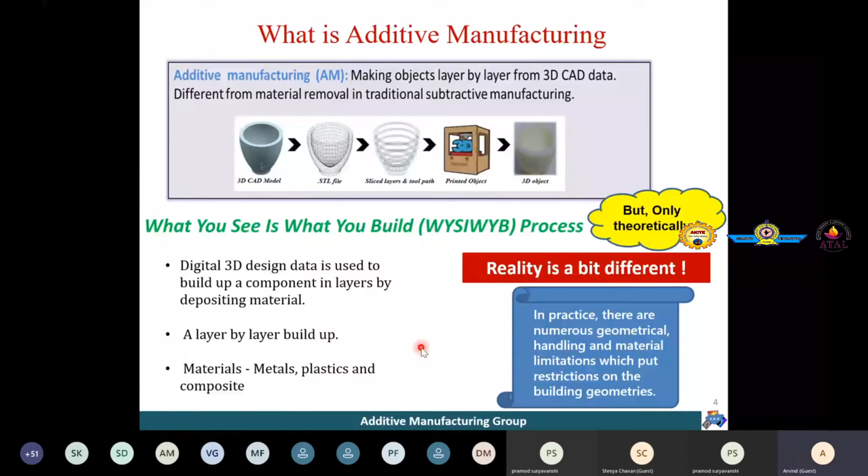So as I mentioned, in 3D printing, digital 3D design data is used to build up a component layer by layer by depositing material. And we follow a bottom-up approach, meaning a layer by layer build up. Different kinds of materials, metals, plastic, and composites are being used.

This slide shows the basic difference between additive and subtractive manufacturing, which is quite obvious, and I'm sure you know that. In subtractive manufacturing, we start with a bulk feedstock and apply different subtractive manufacturing technology to remove material in order to get your final 3D part. And in this process, a lot of wastage of material occurs.

On the other hand, in additive manufacturing, we start with powder material, and following a bottom-up approach, we deposit the material in a layer by layer manner using a 3D printing machine, and then we get our 3D part. As a result, the wastage involved here is very little. So this is the main difference.

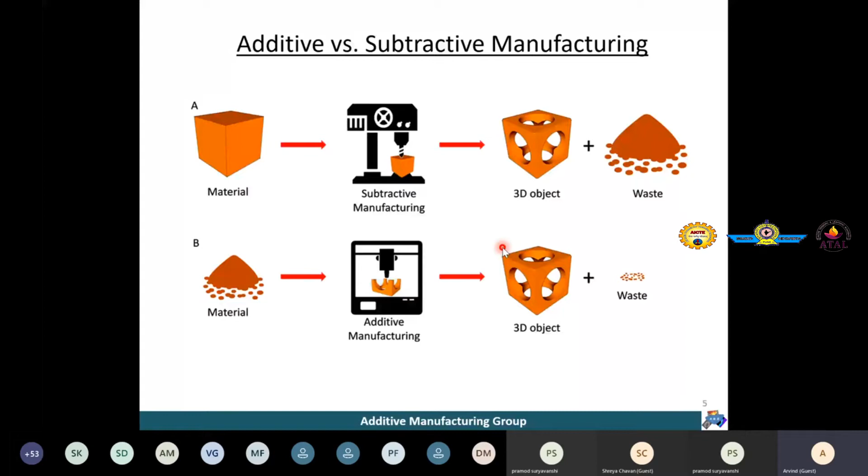In subtractive manufacturing, you might need several machines depending on the final part. However, in additive manufacturing, one single 3D printing machine can do this job for you. And this way we can project additive manufacturing as one of the green manufacturing technologies, because it involves less wastage and less energy by using a single piece of machine.

This additive manufacturing or 3D printing technology is growing very rapidly. Since the last 10-12 years, it has grown to a very large extent, and in the past, none of the manufacturing processes has witnessed such a high growth rate. So there must be some benefits attached, and that is why it is growing so rapidly. I'm just listing some of the main benefits of additive manufacturing.

The first is it involves much reduced material waste and energy consumption. Then second is tooling reduction by single machine requirement. Third is it involves very short time to market, which will help you to reduce inventory. Then using additive manufacturing, you can exercise prototyping and testing right at the concept level.

If you see that the prototype is not passing the test, you just go back to the computer, change the CAD model, and then immediately build the next design.

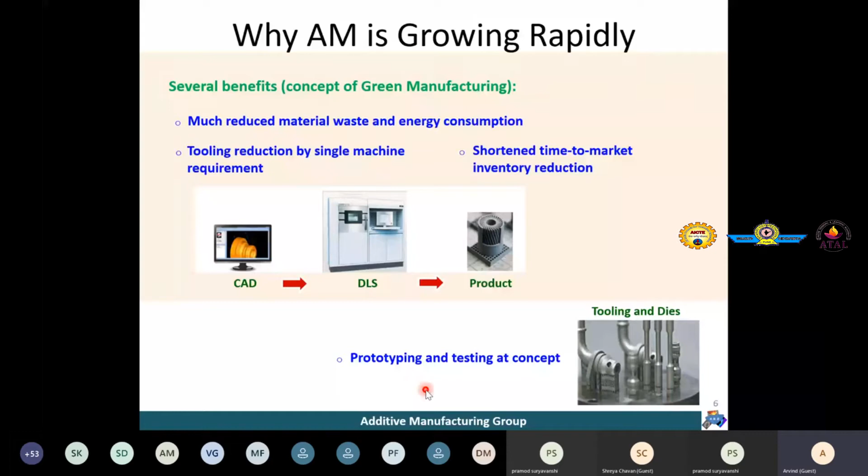Next advantage is complex shapes are not an issue in additive manufacturing, and you can see the figure below, a very complex heat exchanger and then hydraulic component with complex internal channels and complex geometry, and even conformal cooling channels can be very easily manufactured by additive manufacturing. However, this can be really impossible by conventional subtractive manufacturing.

Light weighing is another big advantage of additive manufacturing, where you can design the material suitably at a suitable place, and you can achieve light weighing.

For example, the light weighing example is given here. A traditional bracket used in aircraft, made by forging or forming process, weighs 2 kg. A new design created by additive manufacturing weighs only 300 grams, and it does not compromise performance. So you can see, for just one single part, you can reduce the weight from 2 kg to 300 grams. In an aircraft, several such parts could potentially be manufactured using additive manufacturing, and you can see how much weight reduction is possible. This is one example in a big aircraft, or in automotive, or even a single part use - you can reduce weight, right? You just have to check that you do not compromise performance.

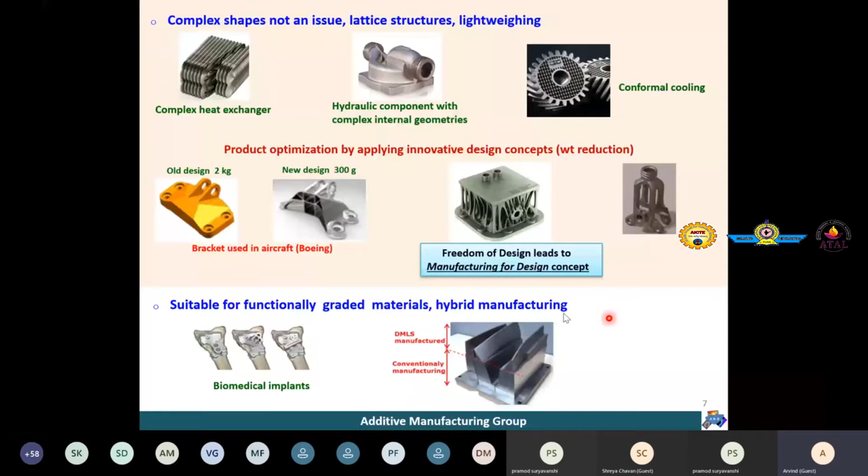So at present, our context is that we can see a significant increase in the market for additive manufactured parts. You can see the business for 3D printing parts from year 2012 to projected 2025 is increasing at a very high rate, and throughout the world, different countries are diverting their focus onto additive manufacturing with a large chunk of funding to develop world-class facilities.

In India also it has started, but with very low attention. In India, we need to develop additive manufacturing technologies for indigenous production of AM components, and process development for various metals, so that our OEMs and other related industries can be impacted. This is one reason that we in India, as researchers, as students, need to address this issue very well.

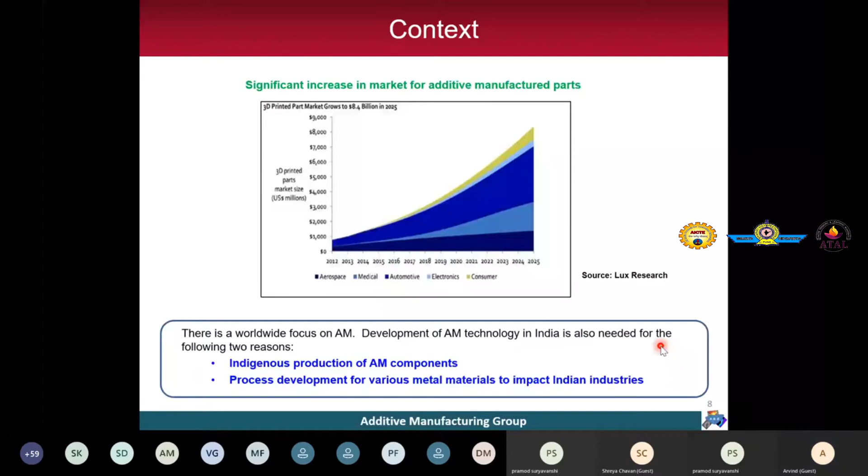So now, since the topic is on metal additive manufacturing, metal 3D printing, I come down directly to metal 3D printing. In metal 3D printing, basically we have two technologies available: one is based on powder bed fusion, and the other is based on powder delivery.

In powder bed fusion, you have heard about processes like selective laser melting, called SLM, and now it is referred to as powder bed fusion technology. If laser is used, it's LPBF. If electron beam is used, it's electron beam powder bed fusion. In powder delivery based technologies, we have laser metal deposition, also known now as directed energy deposition, where...

In the powder bed fusion process, we first lay down a layer of powder on the build plate and selectively apply laser to melt and consolidate it to create the final part of that layer.

In powder delivery based process, we actually feed the powder particles coaxially or through multiple nozzles simultaneously along with the laser. We do not lay down any powder layer there. The fed powder particles meet at the merging point of the laser at the substrate, where they melt and form a melt pool, which then resolidifies to create a deposited solidified layer. This is followed in a layer-wise manner.

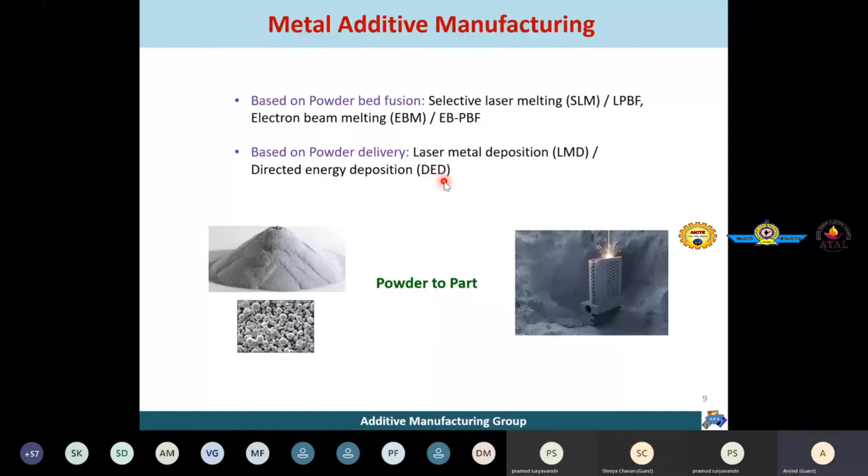So if you look at powder bed fusion technology, we have a powder layer, and we selectively melt the layer using some thermal energy source. This source could be laser or electron beam. Such machines are commercially available from different manufacturers like SLM Solutions, EOS, Concept Laser, Realizer, Renishaw, 3D Systems, etc. The powder bed fusion processes are relatively slow, but they ensure good dimensional accuracy, flexible design, and complex parts.

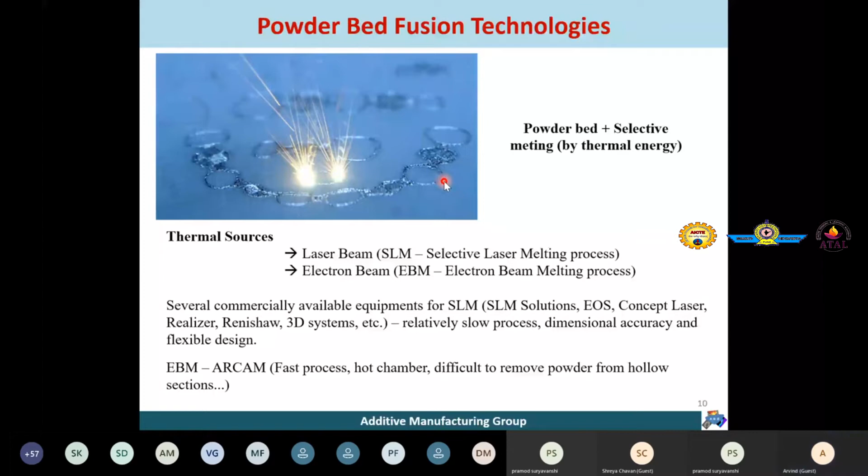So if we see the selective laser melting process, you can see the schematic of this process. We have a previously fused layer or build plate, then a current powder layer, and the laser beam is traversing from left to right. So from the left side we have solidified layer, below the laser beam we have the melt pool, and on the right side we have loose powder.

We can see clearly that as the laser beam traverses, it creates a local melt pool, and as the laser traverses further, the local melt pool re-solidifies to create a consolidated layer. So we can see different kinds of physics, like solidification here, the interface of melt pool and powder, and the melt pool where convection patterns and flow of the molten metal can happen.

Laser is interacting with molten liquid, and here laser is also interacting with some powder. So it is a complicated scenario involving several physical phenomena.

And this is for one current layer in one track. If you want to make a 3D part, one layer needs several tracks, and then several such layers would be required to complete the full height of the part. Build up is always from bottom to top, so build up direction will be vertically upward. Till now, no SLM process has been developed where you can do inclined build up and all.

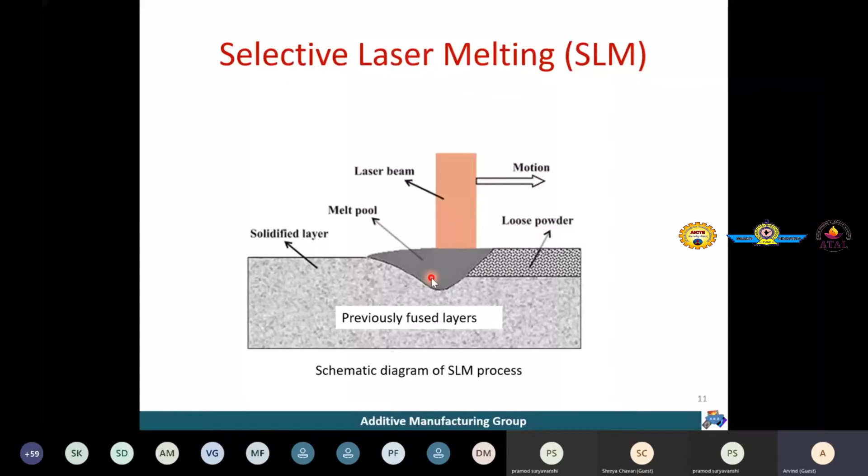So I want to show you one animation where you can see how this SLM process works and creates complex parts.

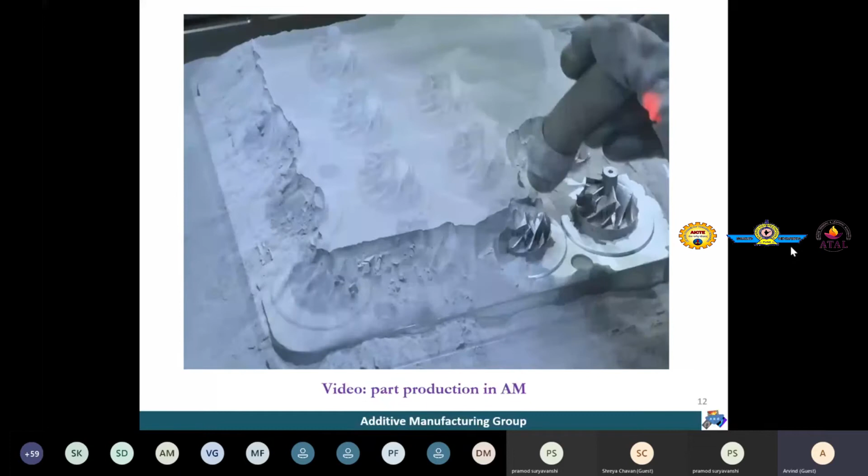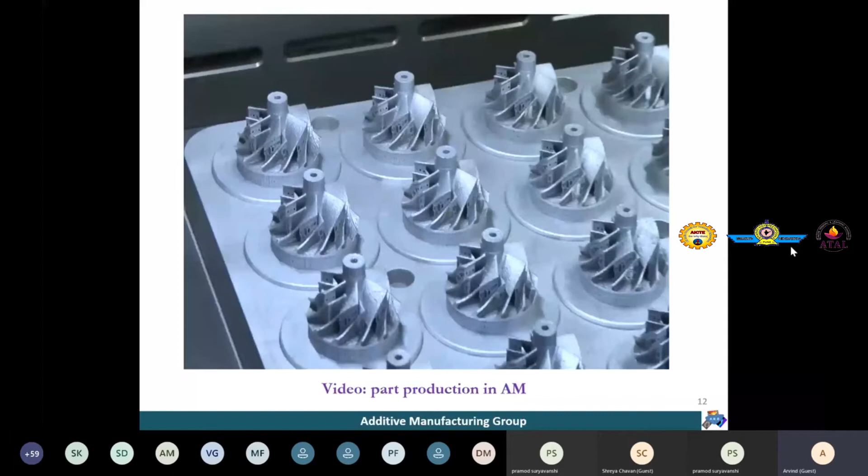Okay, so you saw the video. It looks very straightforward and simple, that you feed some input to the machine and the machine will give you the final printed part. But as I mentioned, for a new part, a lot of understanding of the pre-process, like design aspects, is required, and that has to be sorted out.

Then that design is converted to an STL file, then slicing and tool path generation, which is very important. Then process understanding, how the melt pool forms and how that is related to microstructure and then mechanical properties, that understanding is required. If you play around with all these aspects very carefully, then only can you expect to get a part which will fulfill your performance requirement.

Otherwise you can still get a part, but it will not fulfill your performance requirement. It's like a bad or defective part. So the challenge lies in understanding a lot of pre-processing and process understanding to create defect-free parts, and even after that you need post-processing techniques for improving surface finish, or heat treatment, or techniques for porosity reduction like hot isostatic pressing.

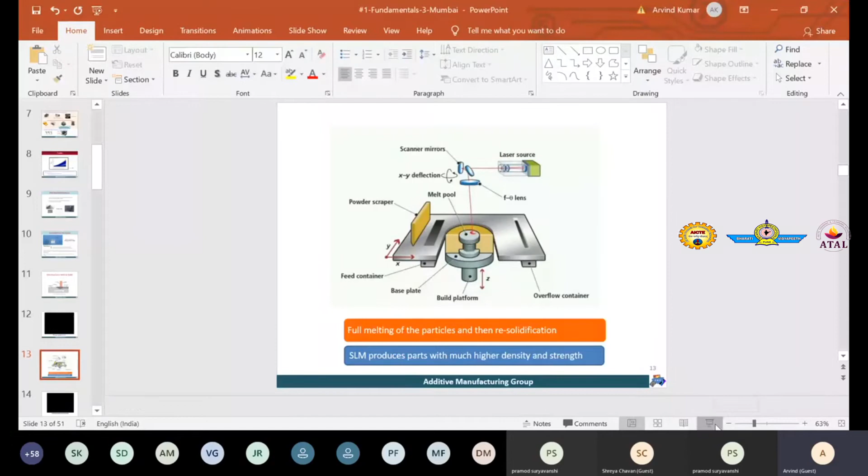Sir, your PPT is not visible, sir. Okay. I think now can you see? Yeah, it's visible. Okay, when I saw the video, I think I have to share again. Okay, yeah, okay, okay, you can continue.

I was telling you that since SLM involves full melting and resolidification, we get part density close to the true density of the material, and that's why we can get higher strength, and the parts produced are something like cast product and welded product.

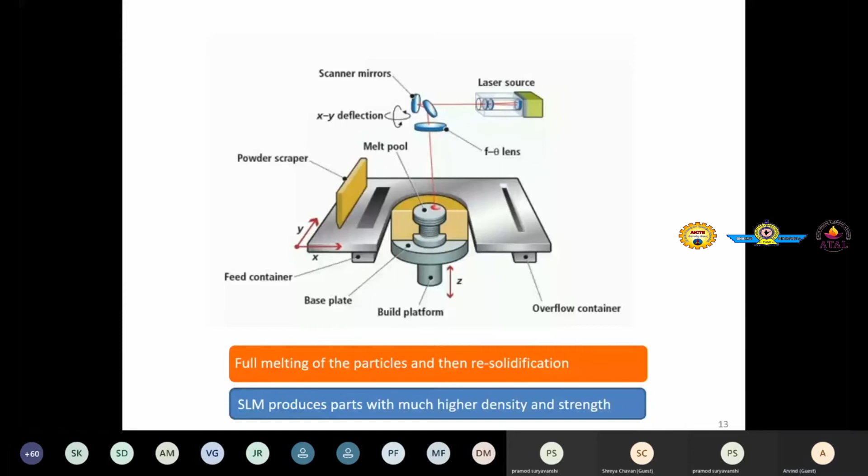So I'd like to show you another video for how laser interacts with powder.

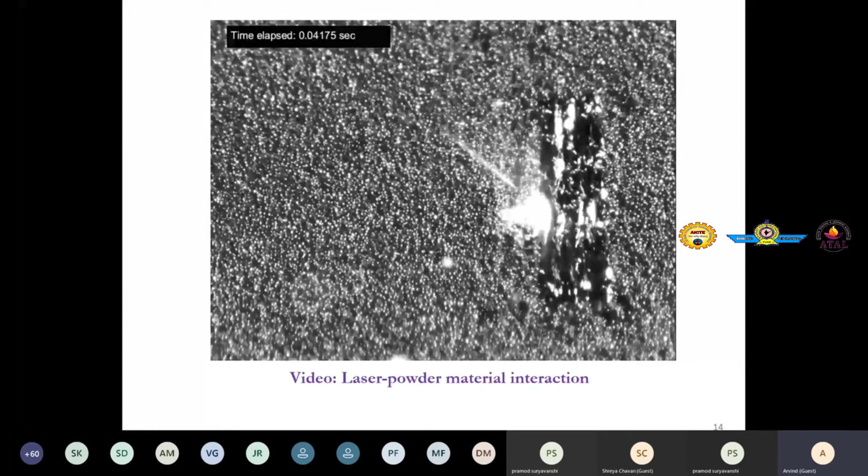You see in the layer several micron-size powder particles are there, and when the laser is impacting and traversing along the designated tool path, local melting and solidification happens, and the melt pool consolidates to a solidified layer. And it happens so quickly, you can see the real time involved there in the video.

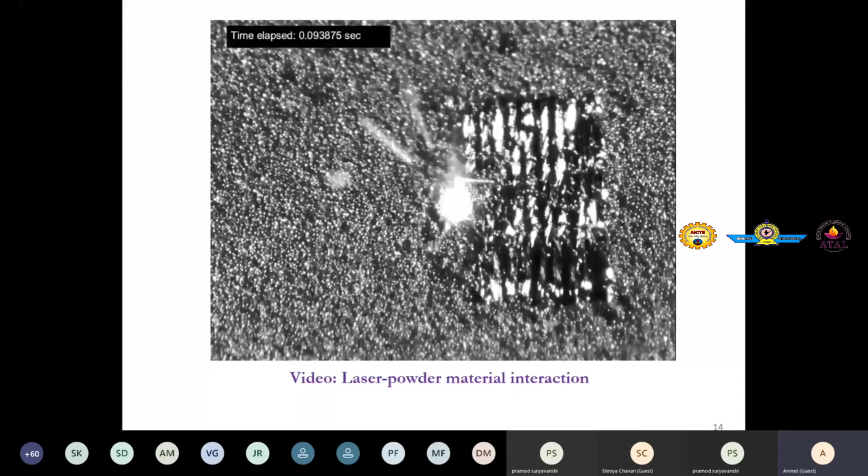Coming to the next slide, we can list down the advantages related to SLM process. This process can be applied to various materials if they are available as powders, and complete melting of powder produces parts with much higher density and strength.

We saw the process is happening quite rapidly. Rapid melting and solidification of these metal alloys results in unique properties that are distinct from, and sometimes more desirable or better than, the cast or wrought parts made from identical alloys. Rapid melting and solidification in such a small melt pool leads to a very fine microstructure, and fine microstructure leads to very good strength.

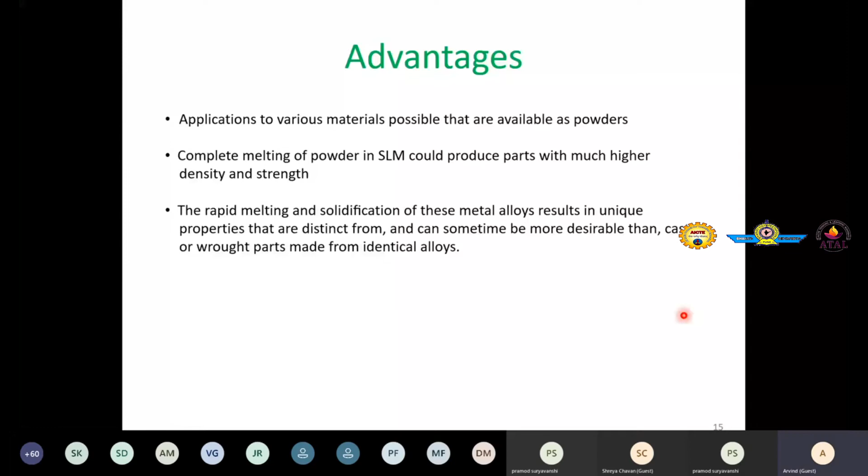At present, different materials are being used in the SLM process, starting from stainless steel, which is used for functional prototypes; tool steel, used for injection molding and functional prototypes; commercially pure titanium, for implants and medical devices; Ti64 alloy, again for implants and high performance functional components; titanium niobium alloy, for implantable devices; aluminum alloy, for functional prototypes, series parts and automotive applications; and cobalt chrome alloy, for functional prototypes and medical and dental applications.

These are for metals, but SLM can also be applied for composites, plastics and polymers, and sometimes metal matrix composites or polymer metal composites. Nowadays it is also being tried for metal nano composites. Some research is going on; in fact, for metal nano composites, we are also working on one problem using the directed energy deposition process.

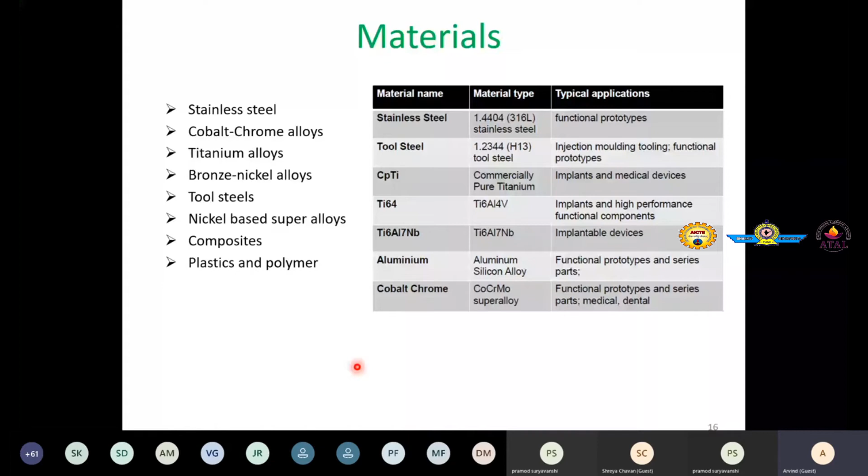Now, if you see the process, as I mentioned, process understanding is crucial here. We must understand what parameters or aspects are involved in the process. These parameters could be categorized under different categories like material parameters, laser parameters, and process parameters.

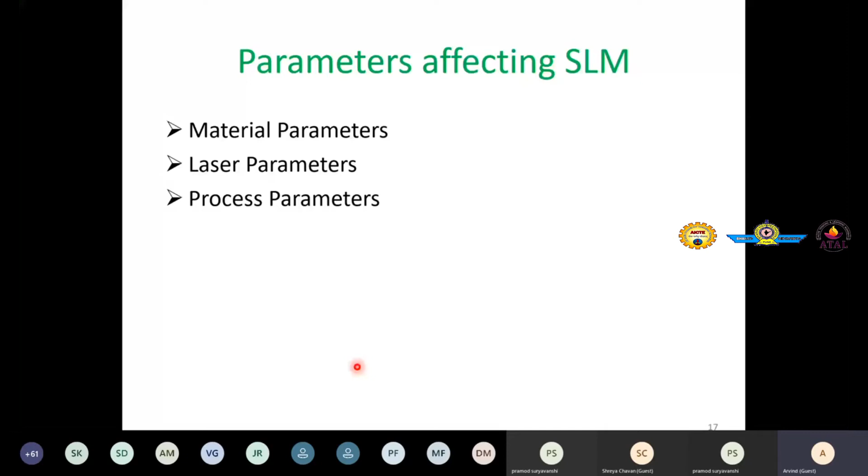Starting with material parameters: this means powder characteristics, involving its shape, size, thermal properties, optical properties like laser absorption characteristics, and the particle should not be too reflective and so on.

Powder size distribution is also important, because while spreading the powder layer with the recoater, the powder should be flowable. So powder size distribution becomes very important. Typically in SLM process, we want a very narrow powder size distribution, so that most of the particles are more or less uniform in size and spherical in shape. Powder morphology comes here too, the shape - spherical shapes are desired.

So shape, morphology, and size distribution affect the generation of the powder layer. Since it is the first input to the process, where the laser interacts and creates the solid part from that powder layer, it is very important that powder characteristics are well chosen.

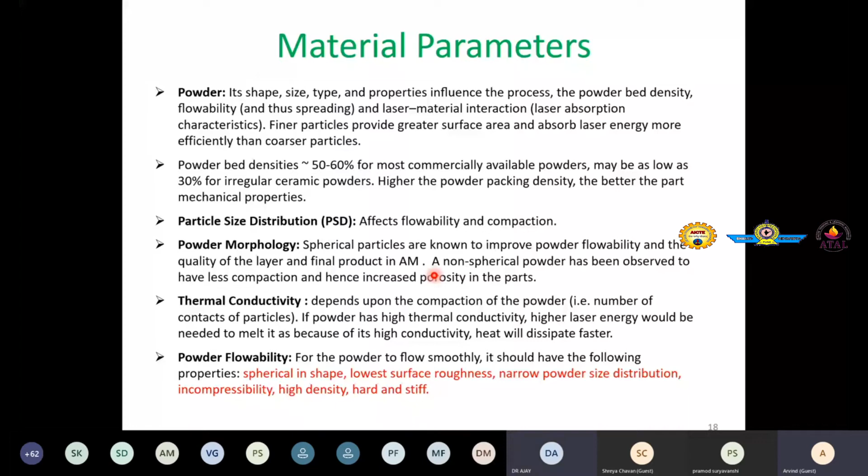Then comes the second category, laser parameters. Various laser parameters include pulse width, pulse rate, time gap between two pulses, wavelength of the laser, mode of operation of the laser, beam quality, spot size, laser power, and so on. Most laser beams do not have uniform energy distribution - they have Gaussian or other kinds of energy distribution, like top-hat. This distribution needs to be understood, only then can we develop a good understanding of the interaction of such laser beams with powder material.

All these affect the process. Laser power, spot size, scan speed, and powder bed temperature together determine the energy input needed to fuse the powder into a consolidated part. The longer the laser dwells in a particular location, the deeper the fusion depth and the larger the melt pool diameter. In the SLM process, typical layer thickness ranges from 100 to 150 microns.

In fact, this is large - there are processes where the layer thickness is about 20 to 30 microns. So you can imagine, if layer thickness is that small, your particle size should also match that layer thickness - it should be lower than the layer thickness. When you use finer particles and finer layer thickness, you can expect the surface finish will eventually improve.

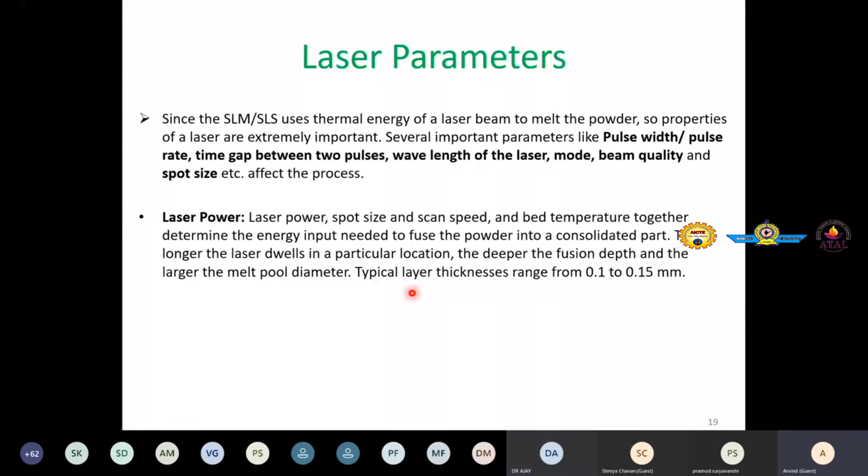After laser parameters comes process parameters. Here, you can guess what the main process parameters could be, like scan speed, hatch spacing, layer thickness, and scanning strategy.

Scan speed directly influences the productivity and affects the density of the final processed part. Hatch spacing is the distance between two successive scan tracks, and a certain amount of overlap is necessary between consecutive hatch lines to avoid porosity and provide better layer integrity.

Layer thickness: with an increase in layer thickness, higher production speed is achieved, while with a decrease, higher precision is achieved. A good scanning strategy makes the resultant product free from distortion, warpage, anisotropy, inaccuracy, porosity, and thermal stresses. We will see some of these aspects in the subsequent slide.

Since we are talking about layer-wise production, there is a repeated thermal cycling effect, so you can expect a lot of thermal stresses developing, and that should be kept at an acceptable limit to avoid distortion and warpage.

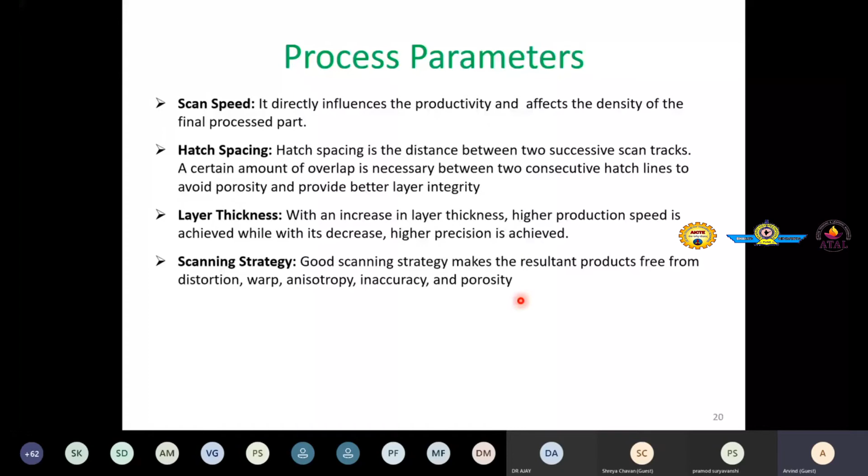Now coming to challenges in the SLM process, surface finish is one of the prominent challenges because you cannot achieve surface finish better than the particle size. Typically the particle size used is 15 to 40 micron, so your Ra value of surface roughness would lie in that range only. But there are many subtractive or micro machining processes where you can achieve very fine surface finish. So this is one challenge.

We have to compromise with surface finish, and if you want to achieve better surface finish after printing, we have to adopt some post finishing operation. But those post finishing operations can finish the exterior surface, while the interior surface finish is again a challenge.

Then the next challenge is the density problem. We typically want the part density to be close to true material density, something like 99.9% to 99.99%. But because of many reasons, like bad selection of process parameters, defects like porosity arise, and the density falls behind that close to 99.9%.

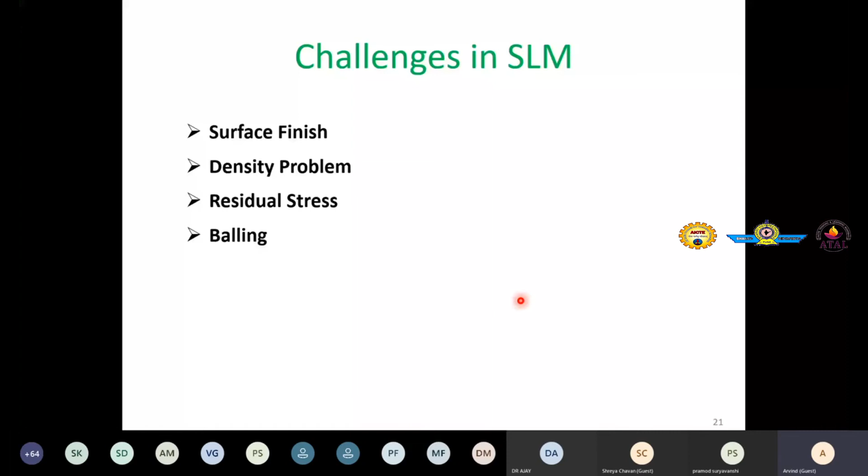One more challenge in SLM is the balling defect, which we will see in the next slide. The balling defect is shown in the photograph on the right hand side—instead of a continuous track, we obtain a spherical ball kind of track.

This is because of an inappropriate choice of process parameters. Balling is something like instability of a liquid on a solid, where the liquid splits into smaller entities in order to reduce surface tension variation. It is caused when the total surface of the melt pool becomes larger than that of a sphere of the same volume.

For example, in the figure below, it is shown that if the length L to diameter D ratio of the melt pool is greater than 2.1, the molten metal would break up into small droplets to minimize the surface energy according to minimization of surface tension, and we will not get a continuous track.

In this figure, you can see that if we use less laser power, we expect the balling defect. As the laser power is increased, such phenomena is reduced. Similarly, it can be related to other process parameters like scan speed, spot diameter, layer thickness—all are interrelated. So the takeaway message is that we need to minimize this balling defect because we want a continuous track.

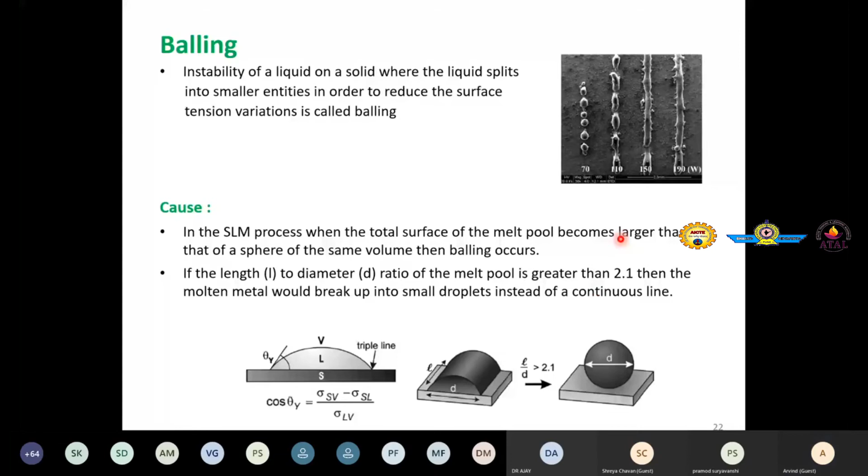I like to elaborate on residual stresses. The residual stresses are defined as locked-in stresses that remain in the component, which is in equilibrium with its surroundings. The main source of origin of residual stress is differential heating or differential cooling of the component at different locations. It causes further defects like cracking, warpage, and delamination of layers.

It can be minimized by following proper scan strategy, such as short scan length, or by preheating the powder layer, or by some post-printing methods like heat treatment or something like that.

You can see because of residual stresses, some layers are spread apart and delamination is happening. In this figure, cracking is happening.

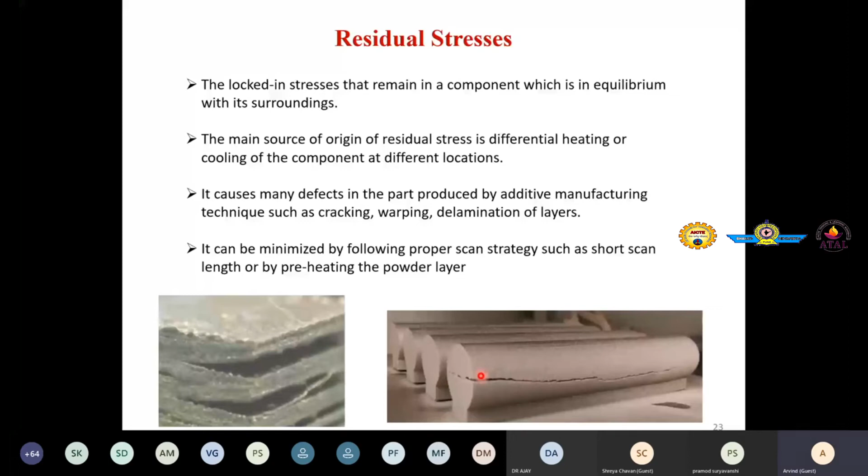So the mechanism of this residual stress, why differential heating and differential cooling leads to residual stress formation, is being explained here. At a local melt pool, when laser was falling on that, the melt pool will form. And at the edge of the melt pool, due to heating, expansion of material happens.

And because of that, the surrounding material experiences, due to an opposing effect, compressive stresses. So during heating, we are experiencing expansion near the melt pool boundary, and below that a compressive stress. When the laser moves away and that melt pool starts to resolidify, you can see

very well that when shrinkage is happening, most of the metal shrinks, right? And because of that shrinkage, you can see different stresses like tensile kind of stresses are developed near the melt pool.

And this is experiencing a tensile stress. So you see very easily that a region in the vicinity of the melt pool tries to expand but is restricted by surrounding material during the heating cycle. Thus, compressive stresses will generate in the vicinity material.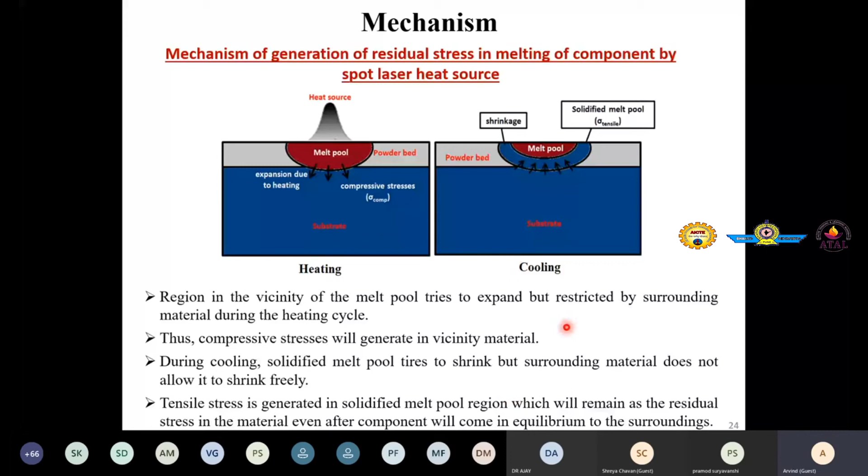Now, when the next layer is formed, several things can happen again in a repeated manner, and that's why the stresses get locked across different layers, and we need to ensure that the stresses do not cross the threshold.

However, during cooling, after removal of the heat source, when the heat source crosses that location, the top layer shrinks as shown and contracts. The component bends in the direction of the heat source and delaminates from the substrate. This is how it happens.

So if stresses are excessive, then this delamination will happen, right? So this is why it is very important to understand the thermal cycle happening across different layers, and we need to ensure that this thermal cycle does not become too bad that it gives rise to achieving the threshold value of stresses.

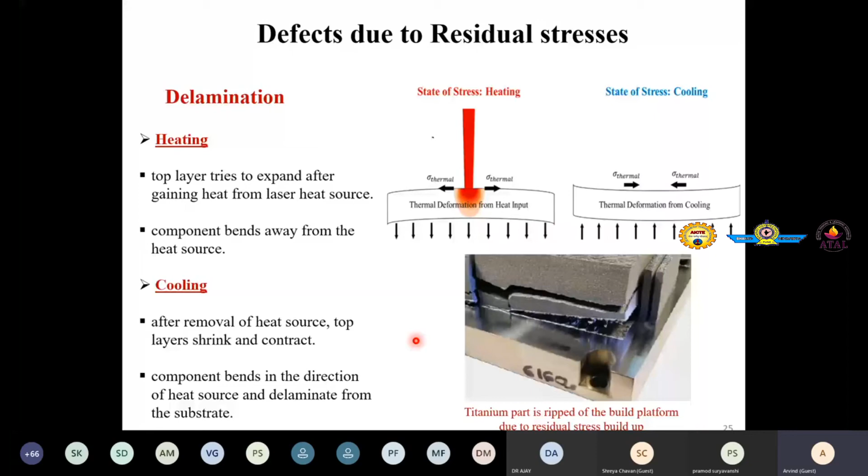So some remedies for residual stresses during the process we can adopt, like we can design the scan strategy in a proper manner. Different scan strategies are available, and each gives a different magnitude of stresses in the part.

So it will produce stress variation locally. Then there are several other scan strategies like the island kind of scan strategy, where a serpentine manner of scans is adopted.

Each island has a different kind of serpentine pattern, like 90 degrees, 0 degrees, then again 90 degrees. So you are restricting the thermal gradient to a local location, and the adjacent location again has a local thermal gradient, but in a different direction. So each zone tries to nullify the thermal effect of each island, and because of that stresses will also nullify.

So this way we could reduce the residual stresses in the part during processing.

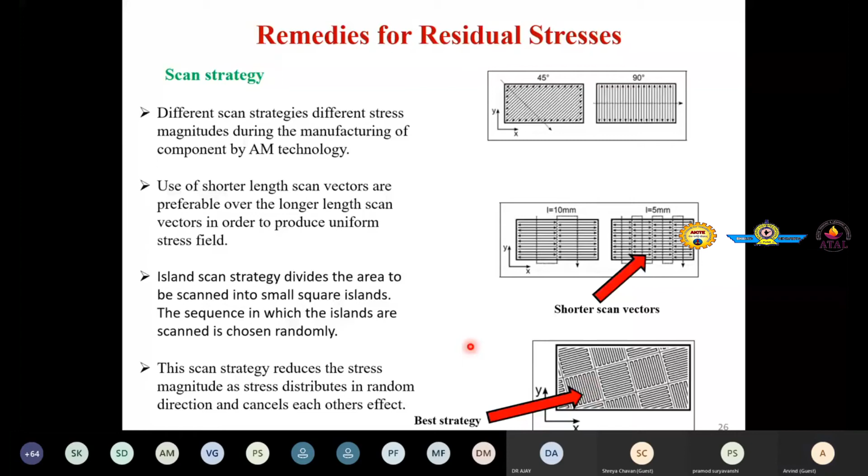Some other technique is preheating of the powder layer. This means that before starting the laser to scan a current layer, we preheat the powder layer. Preheating basically minimizes temperature gradient, and if you minimize temperature gradient, your thermal stress will minimize, and as a result you will not achieve the threshold value.

But in SLM, preheating is not very popular because it will extend the production cycle, and preheating is not very convenient because you have to use another laser for that. You cannot use IR heating and similar methods in SLM process.

In electron beam based powder bed fusion process, this preheating is very common, because with electron beam, the advantage is that it can scan a layer very fast since it is based on magnetic coils, not optics and galvanometers. So the production time will not be compromised, and preheating of the powder layer is very common there, which is one of the big advantages offered by electron beam.

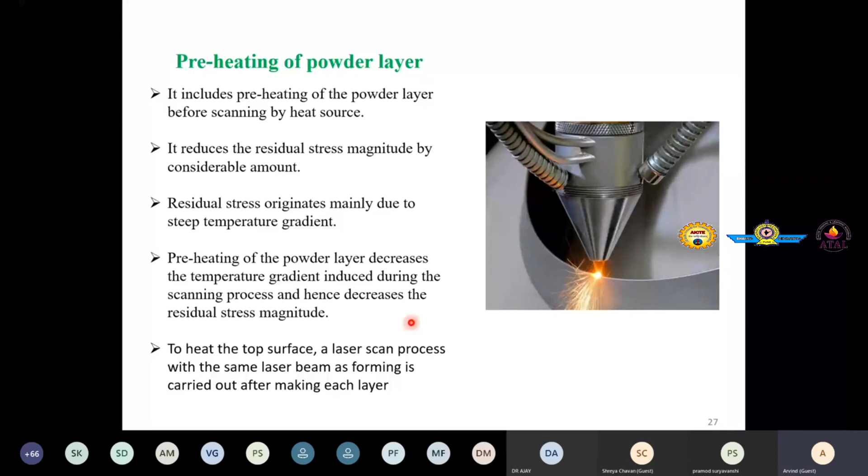Then we could reduce stresses by post-processing. We know that heat treatment relieves the residual stress developed during fabrication. As a post-treatment, annealing is widely used and has demonstrated in some cases a reduction of 70% of residual stresses. Such heat treatment involves heating a material above the recrystallization temperature, maintaining a suitable temperature for some time, and then cooling it with a certain cooling rate.

There is traditional heat treatment we typically adopt for a formed part, welded part, or cast part. So here also we could adopt that.

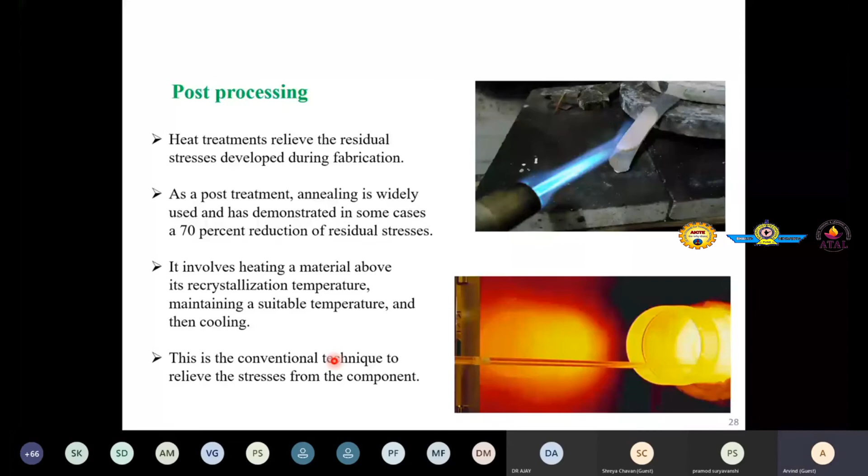Typically, as I mentioned, the layer thickness is, for example, 30 micron. A melt pool size is, for example, something like 50 by 50 micron width and depth. Then the scan spacing is something like, again, 30 micron. Based on this information, you can calculate the number of melt pools in a part which has dimension 100 millimeter by 100 millimeter by 100 millimeter. You will get several millions.

In each such small melt pool, because of rapid solidification, we obtain a very fine microstructure, and that contributes to improvement of mechanical properties.

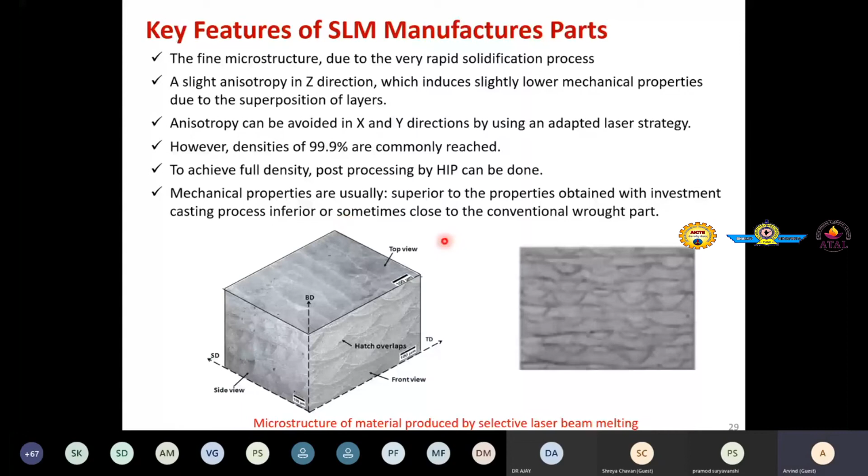This is important information. More on the microstructure of metal AM parts: the microstructure of AM produced metal has unique properties. For example, it has a fine columnar grain structure, and high amounts of grain orientation. Phase formation will take place, with different intermetallic phases, depending on the process and material you are using.

The scan strategy can be used to control the microstructure in theory. For example, we can control temperature gradient versus cooling rate or solidification rate, and we could obtain several kinds of microstructure, starting from planar growth to cellular growth to columnar growth to equiaxed growth. This last aspect has a lot of focus currently, how to obtain cellular growth or equiaxed grain growth. If we produce equiaxed grains, the advantage is that the anisotropy we are obtaining can be minimized.

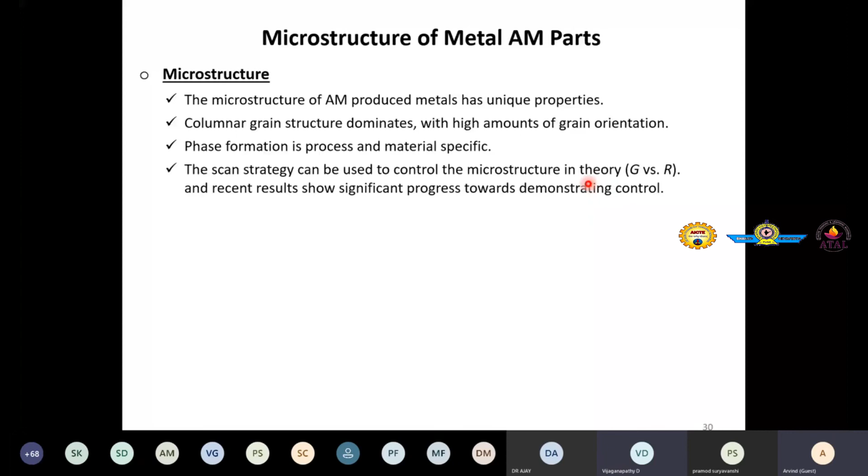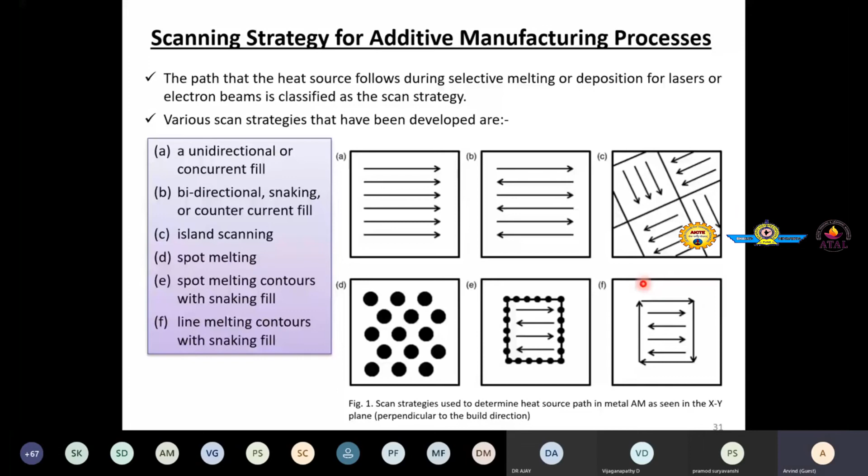Design of support structure comes that you have to design the support structure along with your CAD model. There again, design of support structure becomes an important issue because some experience is needed, so that you achieve the full functionality of the support.

Now, as I mentioned, we need to understand the science involved in the process. So basically, multi-physics phenomena are taking place - thermal, physical, metallurgical aspects. They are also multi-scale. We are talking about a small melt pool, track scale, layer scale. So you see, multi-physics and multi-scale phenomena are involved.

Some of the metal is also getting vaporized - evaporation phase change. Then this molten pool is solidifying, so from liquid to solid phase change. Before that, powder material is becoming liquid, so powder to liquid phase transition.

Then here at the melt pool boundary interface, you have interaction of powder particle to the melt pool. Laser is first interacting with powder material, then melt pool material, like fully liquid material, so change in interaction behavior. Powder behaves optically different than a liquid metal. Then from bottom, heat is conducted to the previous layer or build plate. From here, some heat is also transferred to the powder layer, so heat transfer in the powder. So you see, a lot of complicated phenomena - thermal, fluid, and metallurgical.

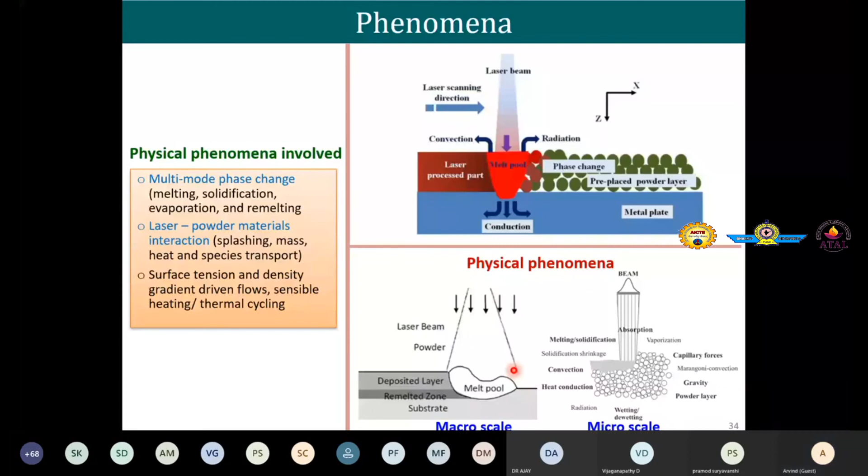Therefore, we need to understand that. Once we understand the physical phenomena, we could able to control the following things like interlayer metallurgical bonding, defects, and microstructure evolution. Interlayer bonding should be sufficient so that delamination does not happen. Defects like porosity or balling defects or unmolten particle defects should not happen. Then we need to understand segregation behavior during solidification. Then we need to understand the cyclic temperature variation so that thermal stresses are minimized, delamination or interlayer defect does not happen.

Most importantly, what we need to understand from here is that the transport phenomena involved, so that we can control the process.

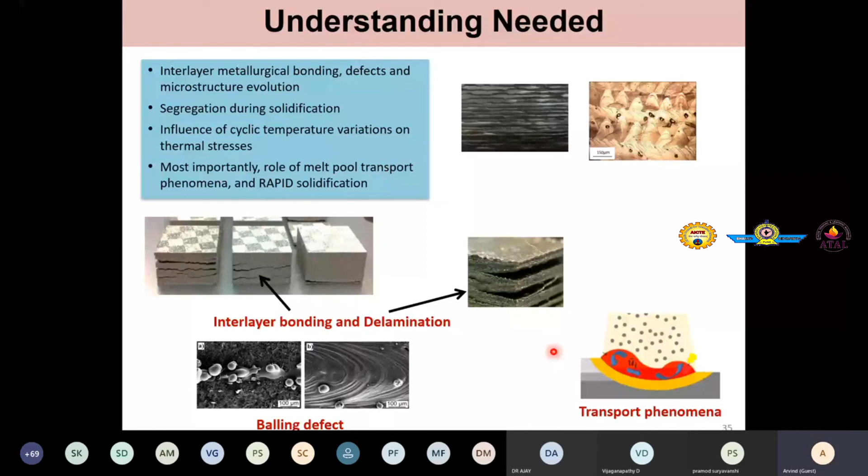So in our research group, we are dealing with such integrated problems experimentally as well as modeling-wise. I would provide you a small glimpse about some of the work. Our research activities encompass melt pool dynamics during powder melting, rapid cooling and non-equilibrium rapid solidification, vaporization, thermal cycling. Then at different scale - starting with system, meso, micro scale studies of powder melting and coupling of multi-scale multi-physics phenomena using experimental and modeling studies.

Then we look at understanding metallurgical layer bonding, microstructure formation, residual thermal stress and defects, and their effect on mechanical property - process structure performance maps for different materials. We are currently undertaking steel, aluminum, inconel, and titanium materials. And then we are also looking for applications in different industries like aerospace, automotive, and tooling industries.

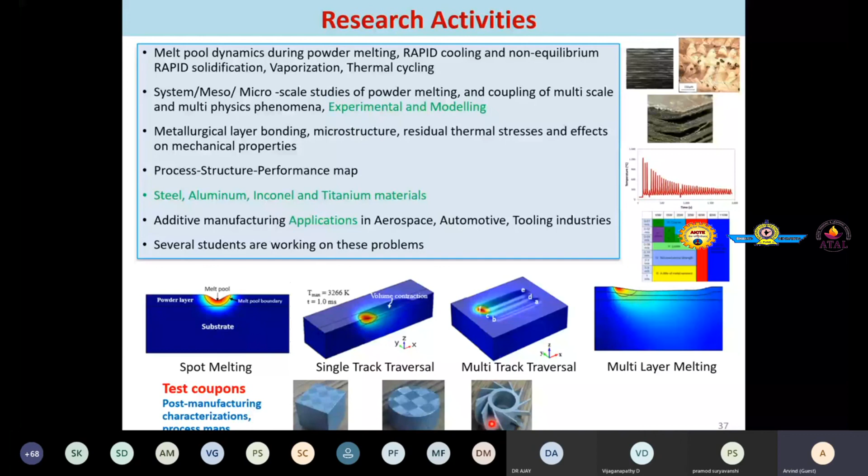To further discuss some results on process modeling, we consider here a mathematical description of the process physics. The laser heat source was modeled, shrinkage was modeled, then various phase transitions from powder to liquid to solid have been modeled.

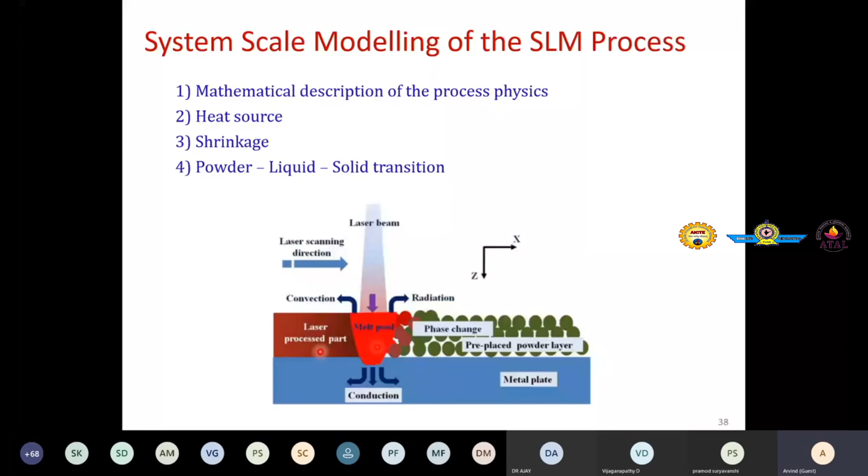Such information can be very useful because you can understand the role of thermal fluid phenomena, and its role on further microstructure formation, melt pool dynamics, or some defect formation like balling or porosity. All these can be understood using such modeling technique.

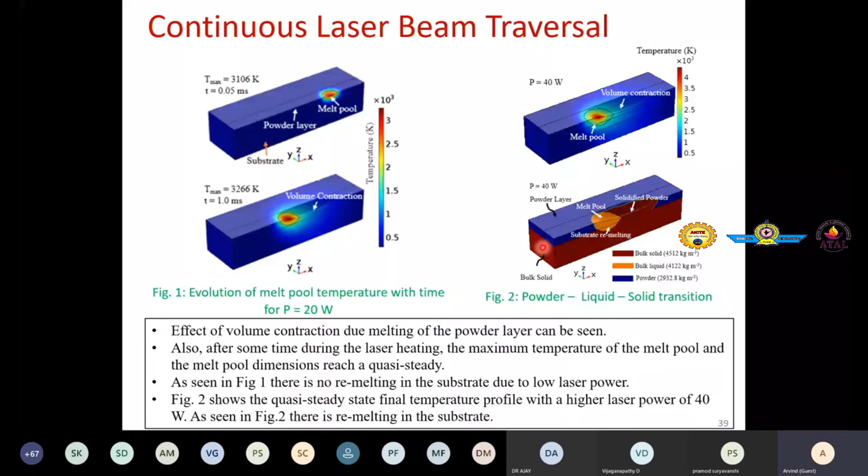So you can very well understand the melt pool flow is not very similar to a laser welding melt pool. It is even more complicated than a laser welding melt pool. And velocity magnitude in the melt pool is quite significant. The maximum velocity obtained in this melt pool was up to 3.5 meters per second, which is quite high for such a small melt pool.

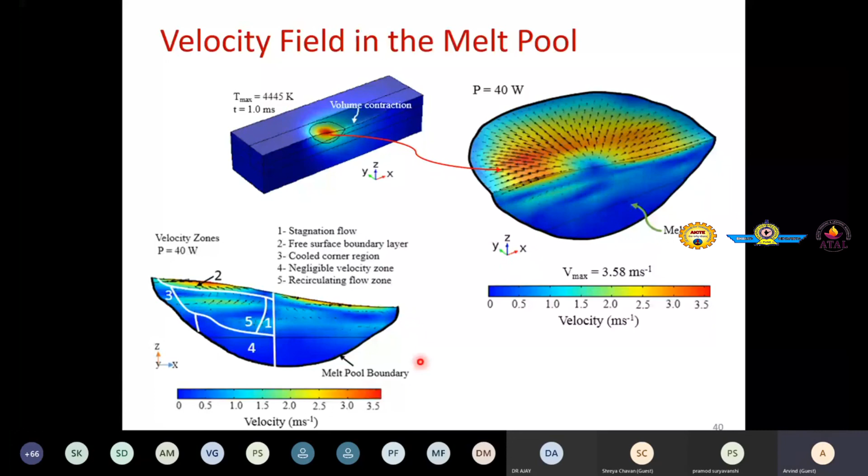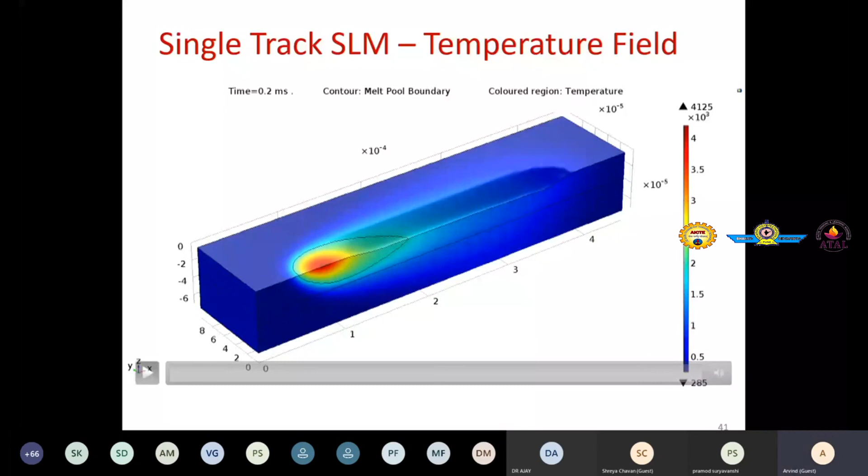So you can see, based on all these opportunities, there is an ample amount of research work available. Before that, I'd like to summarize the current challenges and bottlenecks: limited materials, and properties of metals created through these processes are far from proven or meeting industry requirements.

Repeatability of part production and speed to manufacture large products are also main concerns, along with dimensional accuracy. One major benefit of additive manufacturing is that it can make complex internal features, but improving surface roughness or surface finish in those internal features is still a challenge. These complex internal channels are created for coolant to flow through, but flow in such fine micro channels is affected by the surface finish of those channels. So how to improve surface finish of internal channels is an important aspect.

Of course, this can be addressed with post-finishing techniques, such as abrasive fluid based surface finish or nano finish operations.

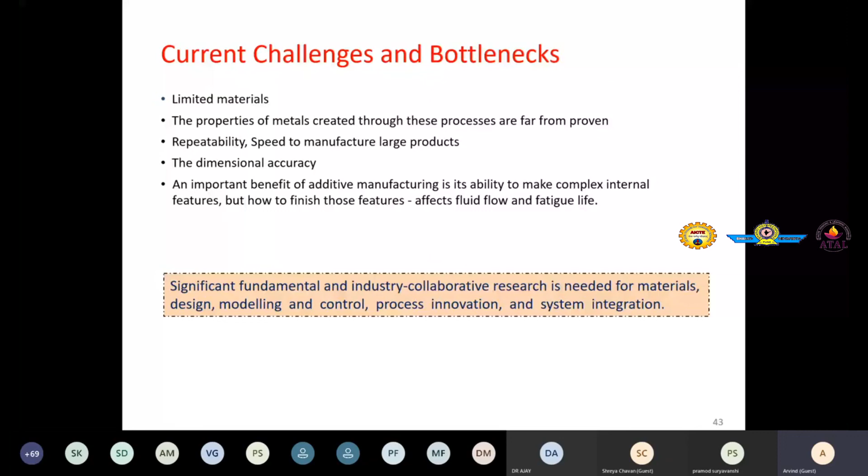With this, I'd like to close this session. Thank you for your attention, and I can take questions now.

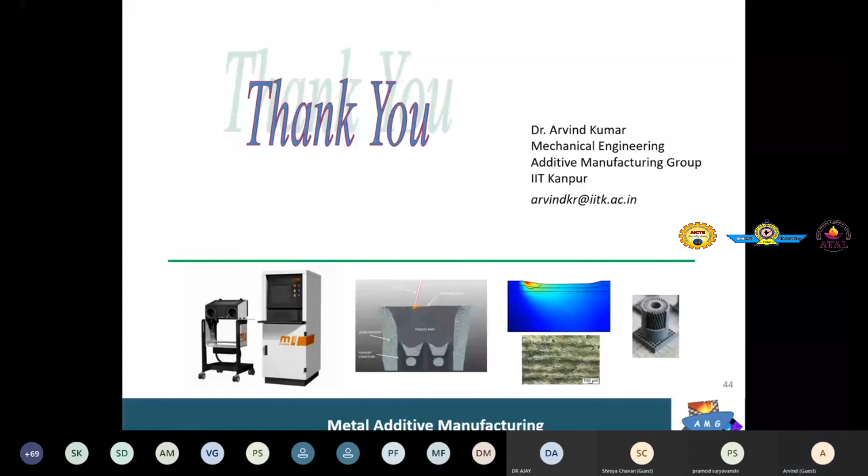Any questions from the participants?

Hello, good morning, sir.

Sir, in SLM, as it is melting by the laser, there may be issues of a recast layer. So how can we rectify that?

No, it's not like a recast layer. Recast layer is terminology sometimes referred to in other manufacturing processes like EDM. Here we say we have a remelted and resolidified layer, because suppose you're operating on the current layer, then on the next layer some part of the previous layer will also get melted and resolidified. That actually works in your favor, because for the next layer to properly bond with the previous layer, you need to melt some portion of the previous layer. We say remelting and resolidification, not recasting. Recasting is not a proper word, I would say.